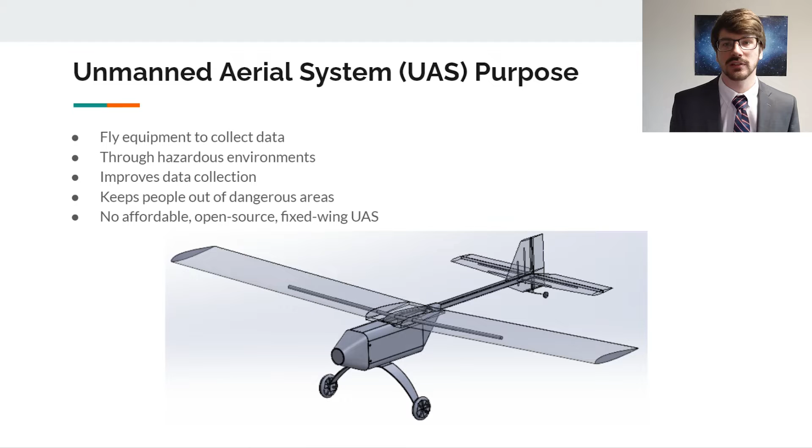Currently, there's no affordable, fixed-wing, open-source UAS, and that's the hole that the OpenUAS team aims to fill. The OpenUAS team is a group of around 15 undergraduate students, including myself, and our main goal is to design and manufacture a UAS that is affordable, easily manufacturable, and easily repairable by users. That way, if a part breaks or if it crashes during flight, it can be easily fixed without having to wait around for parts to be shipped in.

Now, I joined the electrical and software sub-team of the project, and so that'll be the main focus of this presentation. To start, we'll talk about the hardware and software configurations of the craft. On the hardware side, we're using the Pixhawk 4, which is an open source flight controller and is relatively affordable at $196 for the model we're utilizing.

Additionally, it comes with built-in sensors such as a gyroscope, an accelerometer, and a barometer, and allows for other sensors to be added to it that can be purchased elsewhere, such as a GPS, an airspeed sensor, a camera, and a rangefinder. It also runs the NuttX real-time operating system that's Unix-like. It prioritizes fast, efficient, responsive operations and provides a familiar environment for developers to work inside of.

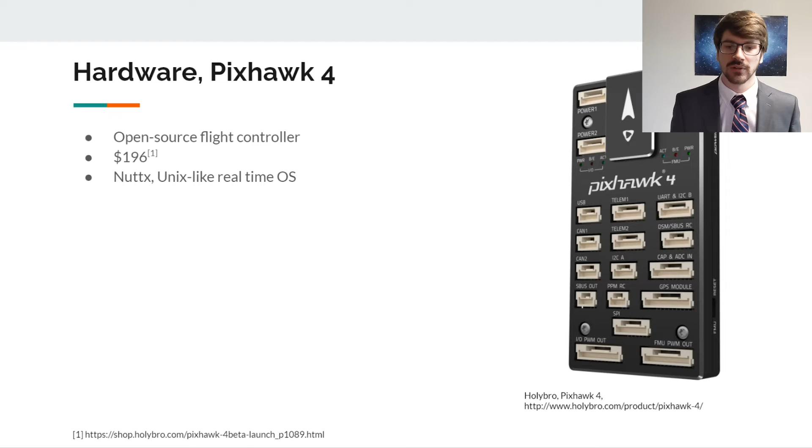On the software side, we're using PX4 Autopilot, which is an open source software solution that is freely available for anyone to view, edit, download, and modify. It's intended for quadcopters and fixed-wing vehicles and is written mostly in C++. Now, within the PX4 software, each craft is defined by its airframe, which includes the number and location of control surfaces, propellers, and many other parameters. This is the main way that we can configure PX4 in order to customize it for our specific craft.

It's also the main reason why we forked our own version of the PX4 software onto our GitHub repository. This allows us to directly program the airframe into the source code of the software, making it easier for other users to utilize our tuned configurations. Our end goal is to integrate our custom airframe into the official version of PX4 or to distribute our own precompiled version.

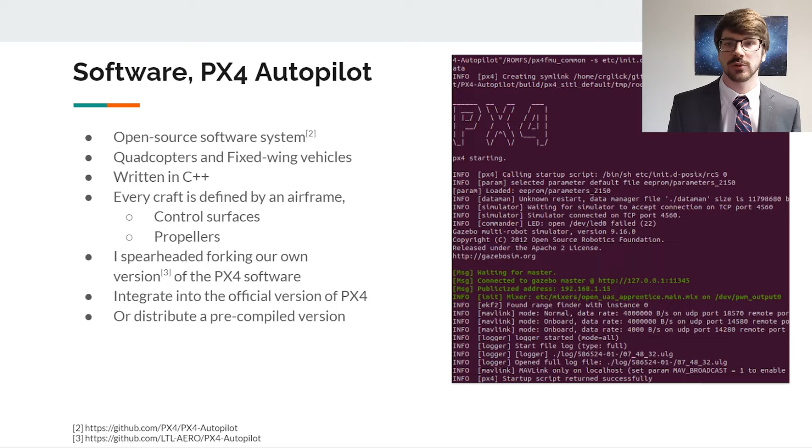Another feature that I'm working to implement into the project is a simulated environment in order to test autonomous features and to train new pilots. To do this, we're utilizing the open source physics simulator known as Gazebo. Gazebo provides us a quick, safe, and cost-free way to test new features that are experimental and to train new pilots under manual flight.

The way it works is PX4 is compiled and run on a workstation computer in place of the Pixhawk 4. PX4 then communicates with an instance of Gazebo running on the same computer, keeping everything locally contained, fast and efficient. Additionally, I was able to develop a simulated environment of the airfield that we actually test at here in Ames. This allows for accurate GPS and elevation information inside the simulator when we're testing new features.

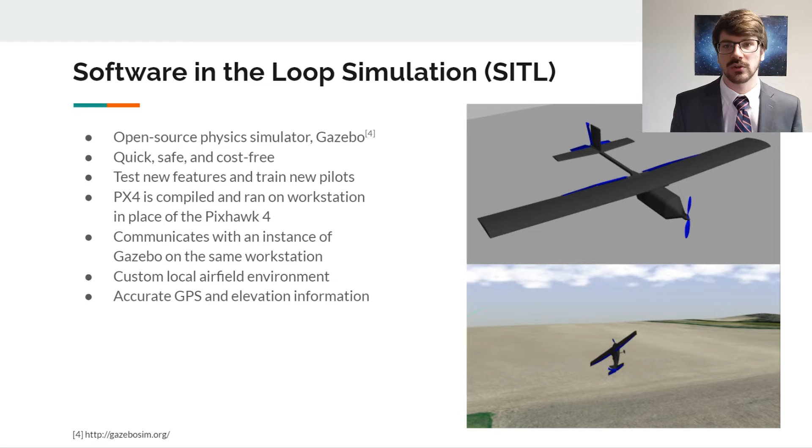This also allows us to create predefined flight plans that can either be executed inside the simulator or in real life without having to modify anything else. Currently, we're utilizing the default simulated vehicle that comes with PX4. However, we're planning on switching this out for our custom CAD model of our vehicle that's currently being designed and iterated upon by our design sub-team. This generally allows for accurate flight simulation of the vehicle. However, each individual component of the craft needs to be accurately defined, including its mass, rotational inertia, and lift coefficients.

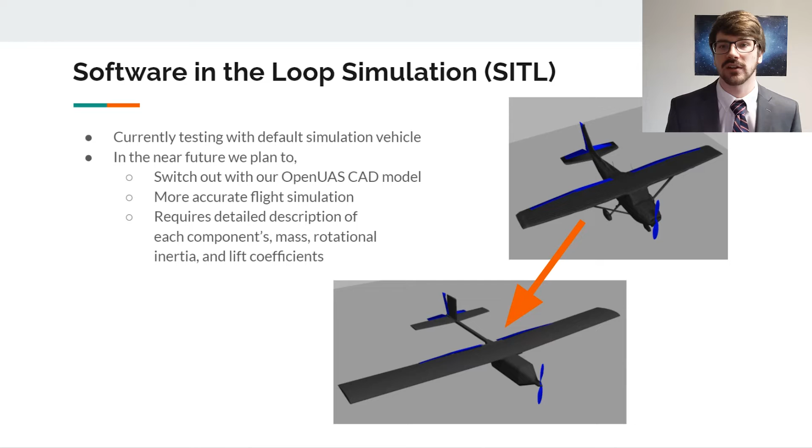Additionally, this semester, we wanted to improve real-time data collection in order to allow for autonomous landing and autonomous takeoff. Currently, PX4 utilizes a GPS and a barometer to estimate its relative altitude. To improve this, however, we added the LightWare SF11/C laser rangefinder. This is mounted to the bottom of the craft and gives us an accurate distance measurement to the ground at any point in flight. This also gives us a range of 120 meters to 10 centimeters, making it perfect for what we're utilizing it for.

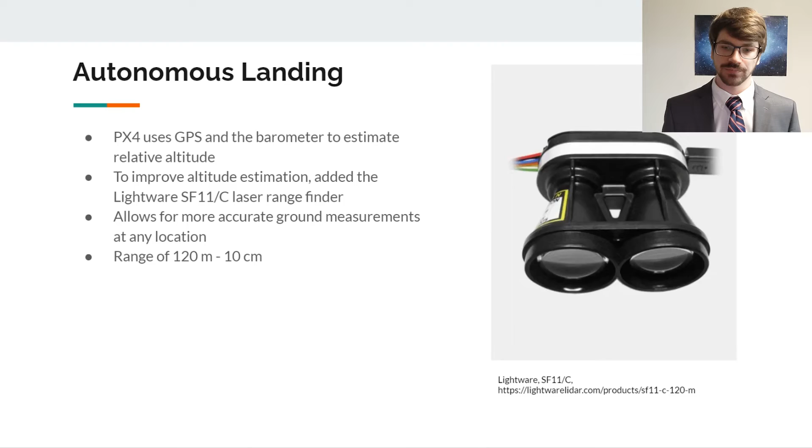PX4 already has a built-in autonomous landing sequence for fixed-wing crafts. By default, it utilizes a GPS, an airspeed sensor, and a barometer to estimate its location, altitude, and speed. Now, typically this autonomous landing sequence can only be used within a predetermined flight plan. However, adding the laser rangefinder allows us to execute this landing sequence without any predetermined flight plan due to the absolute nature of the distance sensor.

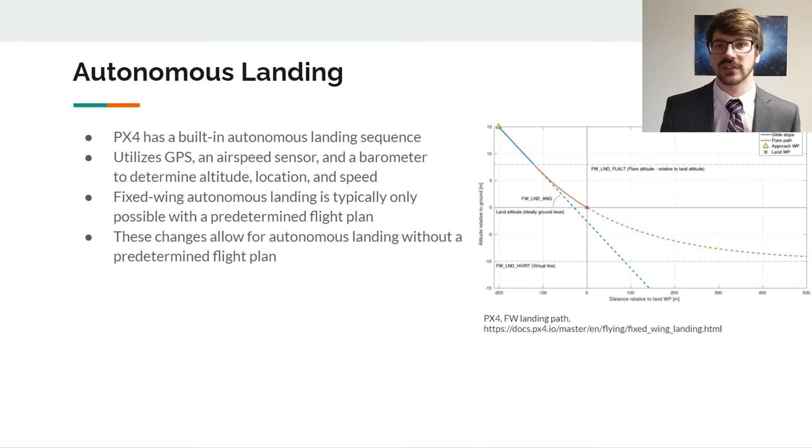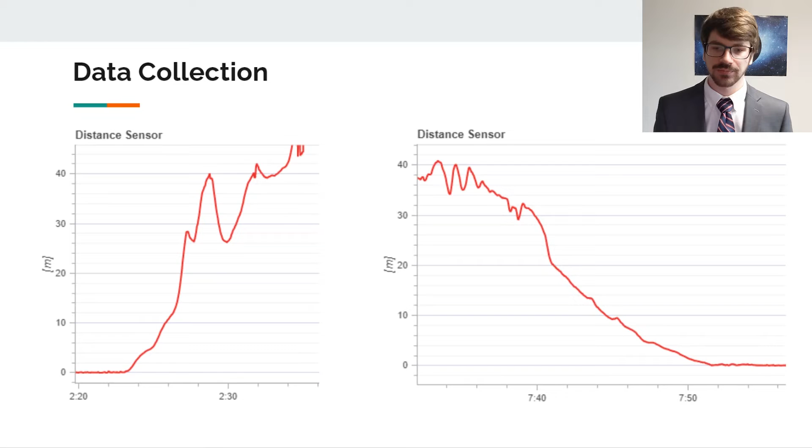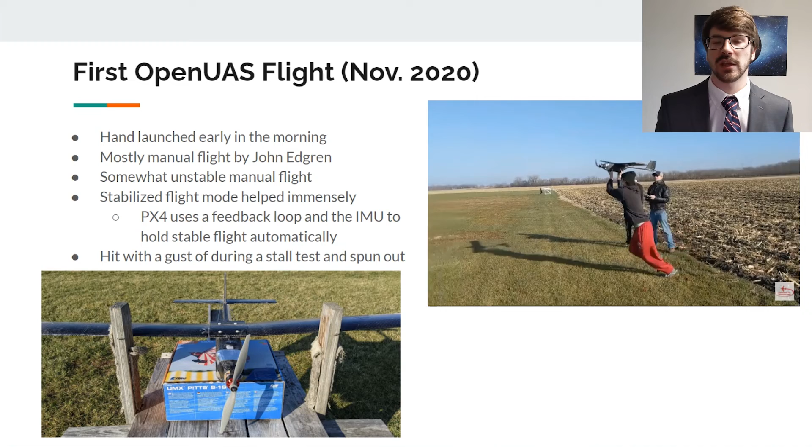Like I mentioned earlier, we did perform several test flights of the UAS in order to determine its flight characteristics, perform autonomous sequences, and to measure our stall speed of our craft. The first flight of the OpenUAS happened in November 2020 and was hand-launched early in the morning. It was flown mostly in manual flight by John Edgren, and it was a bit unstable in manual flight.

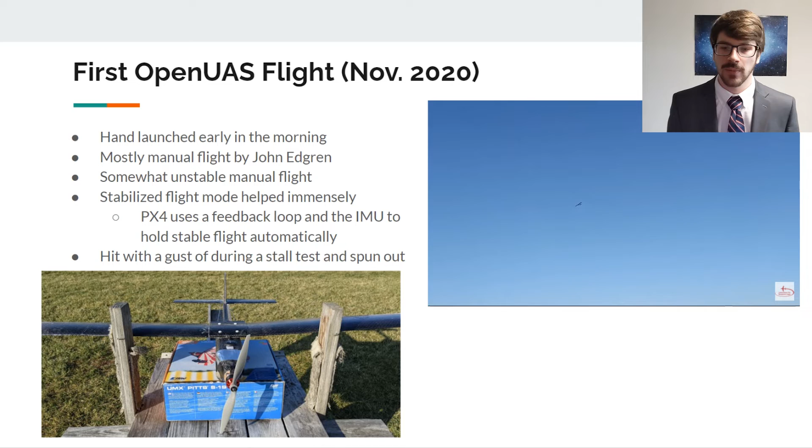However, we were able to switch over to a stabilized flight mode, which utilizes the Pixhawk 4's internal IMU in order to create a feedback loop with the control surfaces and maintain stable flight while it's engaged. Unfortunately, the craft was hit with a gust of wind during one of our stall tests and spun out and eventually crashed. However, we were able to collect a lot of useful information from these flights, including the airspeed and stall speed. Here's a graph of the measured airspeed throughout the flight.

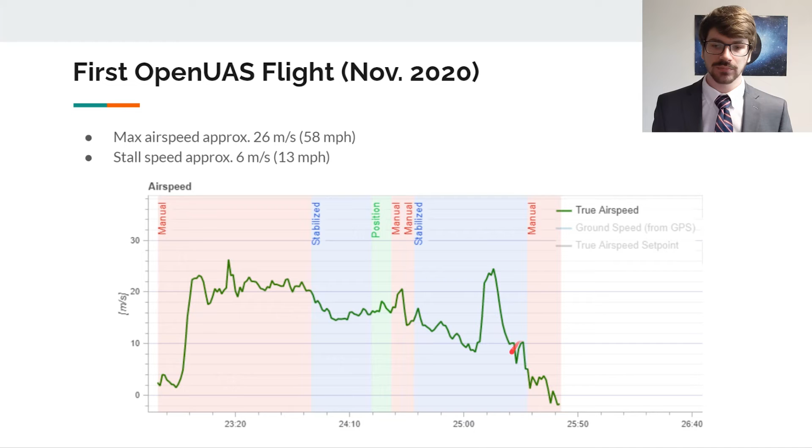We saw a max airspeed of 26 meters per second shortly after takeoff, and a stall speed of approximately 6 meters per second right before the spin out. We also measured the power statistics coming out of the battery for this flight. We saw a peak current draw of 120 amps during takeoff and during recovery maneuvers to pull out of the spin.

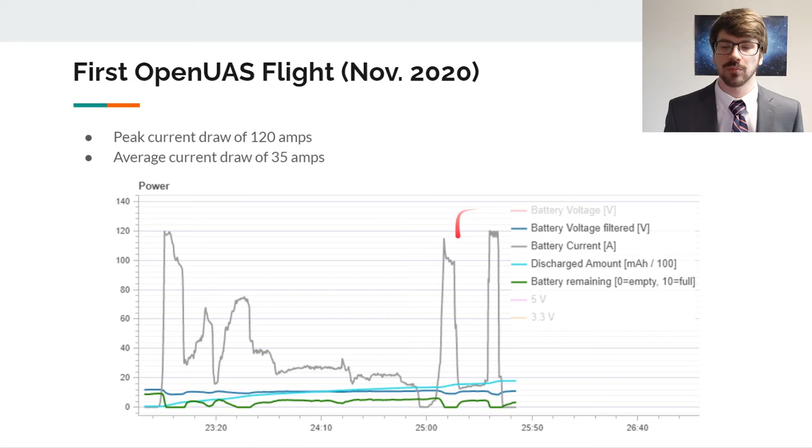Between this first flight and the next major flight of the OpenUAS vehicle, we also tested additional flights on a smaller RC plane known as the Apprentice. We tested stabilized flight modes as well as position modes, which is just generally different ways that the PX4 can control the vehicle and respond to your manual inputs. We also tested predefined flight plans and confirmed our testing methodology for measuring the stall speed of the vehicle that we would then use on later test flights.

We also attempted 2 autonomous takeoff and landing sequences with this craft and a smaller rangefinder. However, both of the autonomous landing sequences were automatically aborted by the vehicle due to a misalignment on approach. However, both of the autonomous takeoff sequences completed successfully.

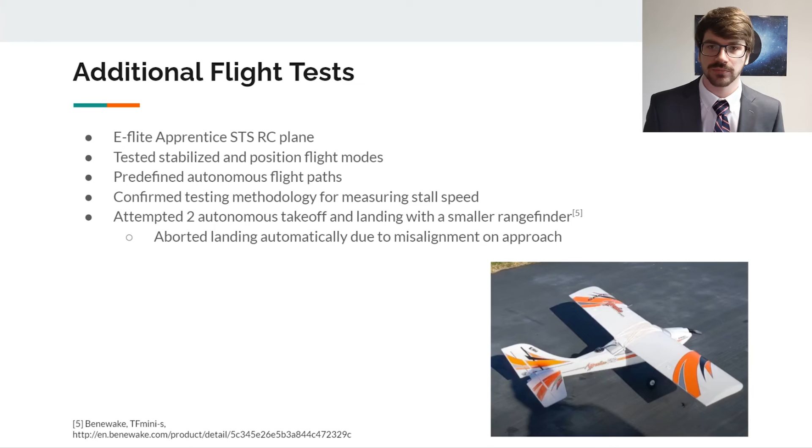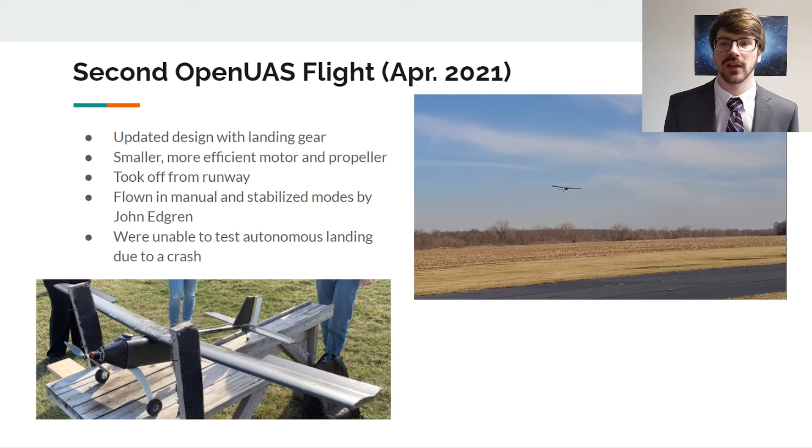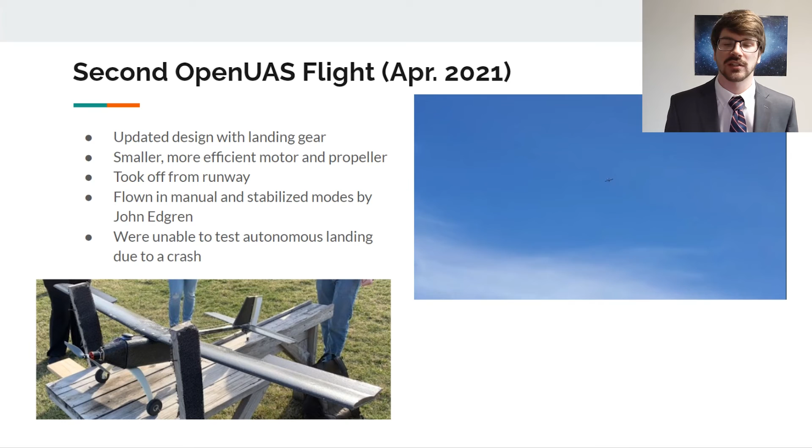The second flight of the OpenUAS happened in April 2021 and featured an updated design with landing gear and a more efficient motor and propeller. This time, it took off from the runway and was again flown in manual and stabilized modes by John Edgren. The main goals of this flight were to test the performance of this improved motor and propeller selection, as well as to get a better idea of the stall speed from the vehicle. Unfortunately, we were unable to test autonomous landing, which was another goal of this flight, due to a similar crash during a stall speed test.

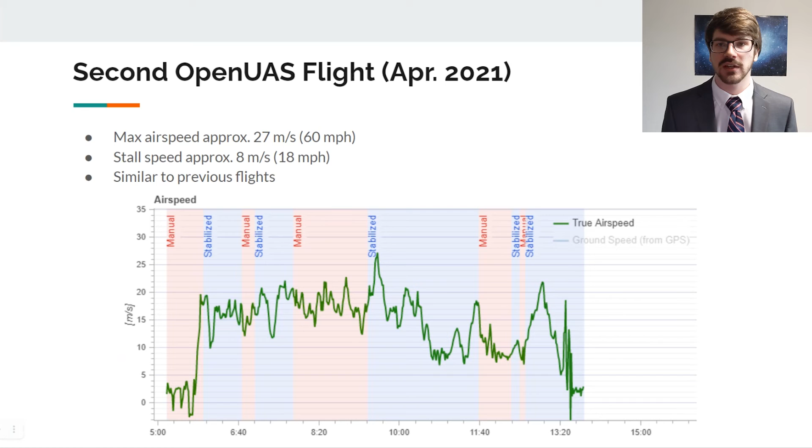Again, however, we were able to collect a lot of useful data from this flight. Our airspeed graph here can be seen. Here we recorded a max airspeed of approximately 27 meters per second, this time around the middle of the flight, and a stall speed of approximately 8 meters per second during those tests toward the tail end of the flight. This is similar to previous flights and is somewhat expected due to the minimal changes of the airframe body.

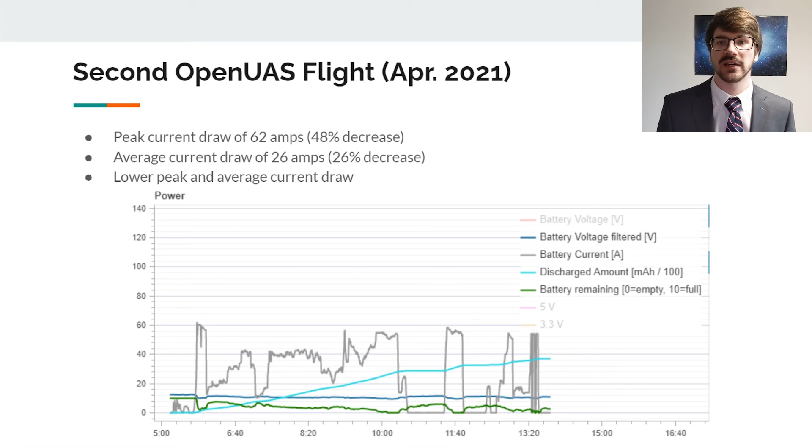However, if we look at our power statistics for this flight, we see a much reduced 62 amps for our peak current draw, again during takeoff and during a recovery maneuver towards the end of the flight, and an average current draw throughout the entire flight of 26 amps. This is significantly reduced from previous flights, which shows an improvement in the efficiency of the craft while maintaining a similar max airspeed and stall speed.

Moving forward, we want to add some of these features to the OpenUAS, including obstacle avoidance. This would involve adding more rangefinders and possibly computer vision to the craft in order to identify and avoid obstacles during autonomous flight paths. This is currently being developed by Marcella Anderson, and I hope to join her in the coming semesters.

Next, we want to improve the efficiency of the vehicle. Our current design is a little bit inefficient, using 268 watts on average. Improving this efficiency at all would generally improve battery life and allow for longer flight times. Finally, we want to improve our battery estimation methods. Our current method of estimating the battery is a little bit inaccurate, and it's not uncommon to see large voltage drops during intensive maneuvers cause the estimated battery remaining to vary wildly.

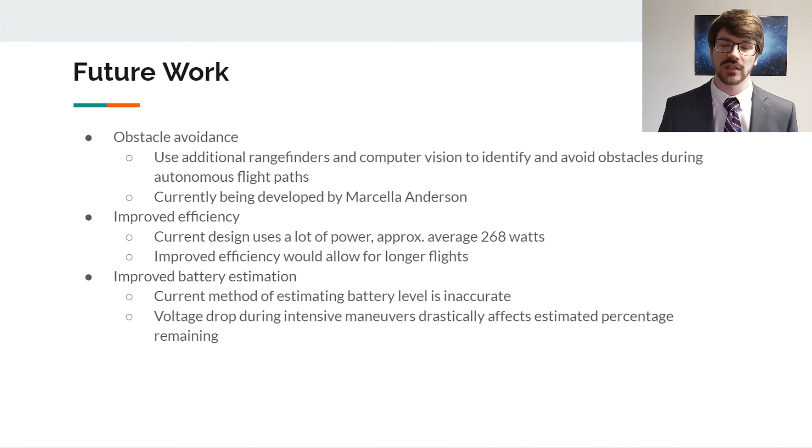In conclusion, during my time on the OpenUAS team, I've learned a lot about the Pixhawk and the PX4 software, how to manage it, how to configure it, and how to modify it to fit the team's needs and goals. Additionally, I learned how to create a synthetic environment and aircraft in order to test autonomous features and to train new pilots inside of a safe, efficient environment. Finally, I learned the basics of aerospace engineering and the terminology used inside of the industry.

I plan to contribute to the team next year as the electrical and software sub-team lead and to improve the software solution even further. That's the end of my presentation.